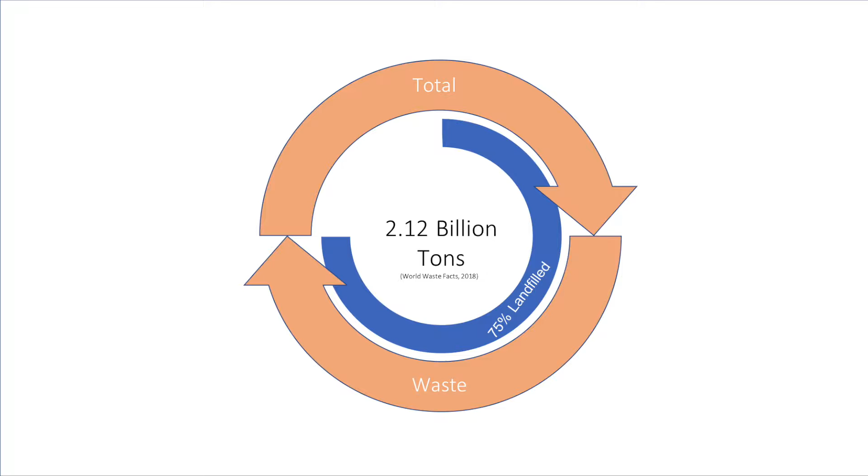Currently, 2.12 billion tons of waste is produced globally each year. Picture this: if a garbage truck were loaded up with 2.12 billion tons of waste, the amount of trucks needed to hold this waste would circle the earth 24 times. 99% of what we buy is trashed within 6 months of ownership. Only 3/4 of this waste is disposed of in landfills, with only 1/4 being recycled. The United States alone generates 380 million tons of municipal solid waste per year, with approximately 63.5% being landfilled.

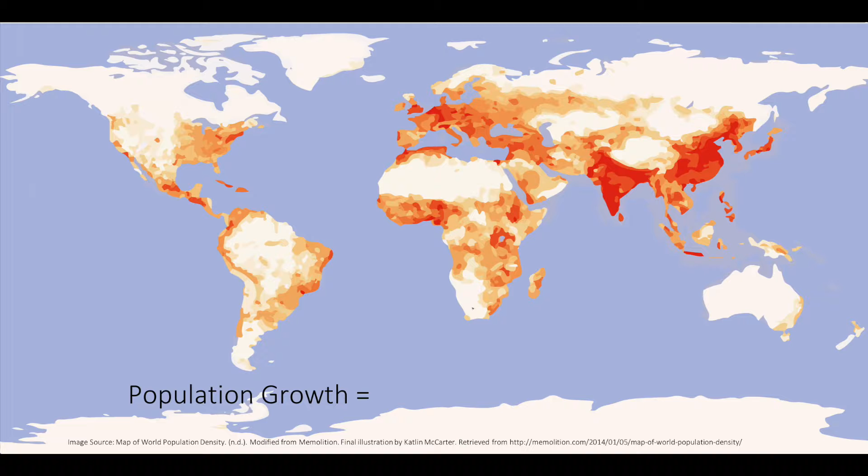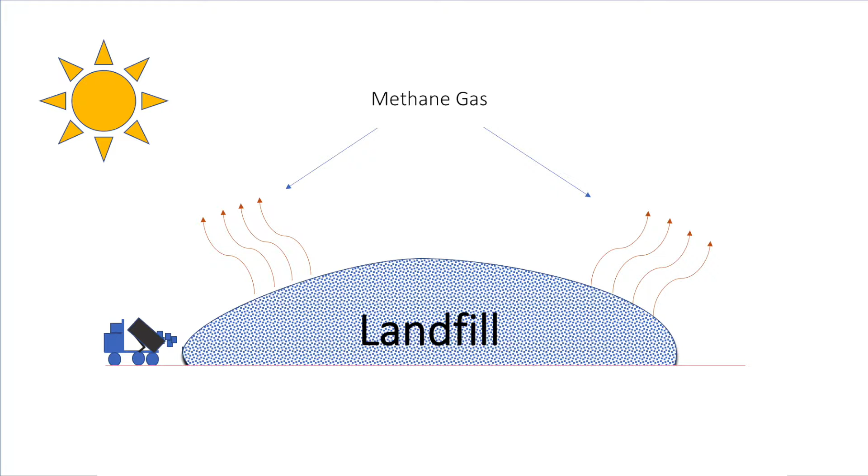As population growth and waste consumption increase, the available space for landfills becomes less. The current state of landfills also poses a threat to the environment. Methane gas, a byproduct of waste decomposition, is a greenhouse gas. Also, leaching waste may pose a threat to surface water and groundwater. As far as we know, packing everyone up and shipping them to another planet is not an option. Also, living on a mountain of trash is not ideal either.

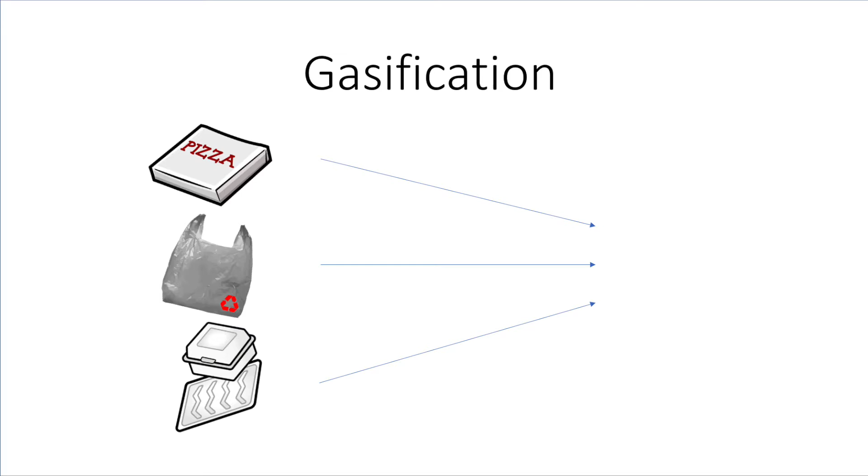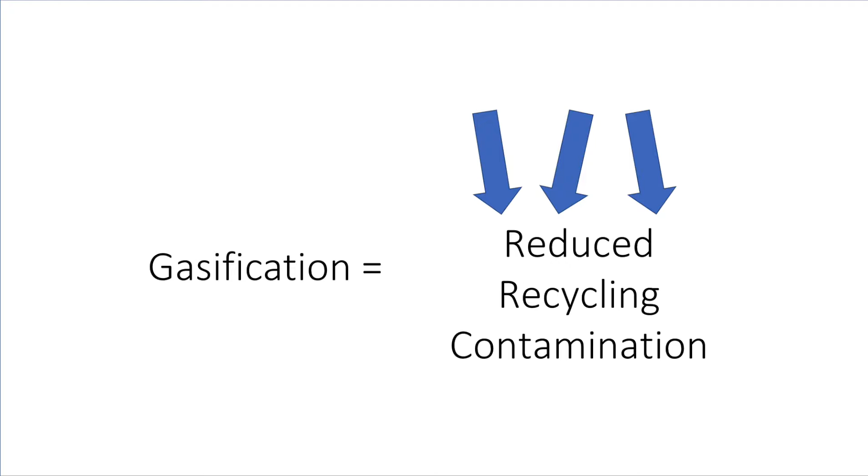Gasification offers a relatively simple solution to the problem at hand. Gasification is the process of taking everyday household items such as pizza boxes, plastic bags, and styrofoam and turning this material into clean, reusable energy known as syngas. As far as the disposal routine within each community, the gasification process offers no real difference. In fact, gasification may offer a solution to the current recycling contamination issues set forth by China's Green Fence policy.

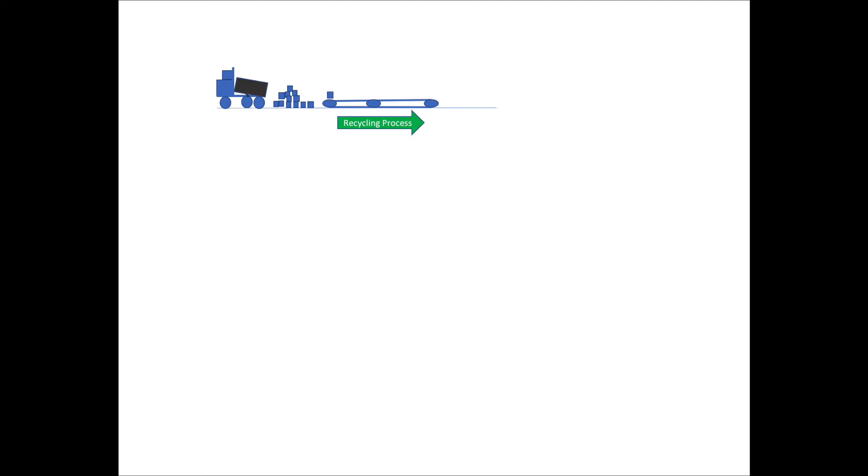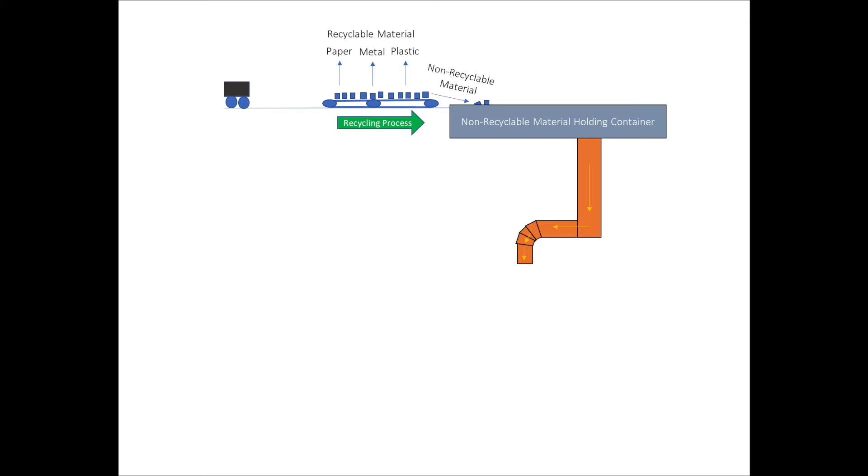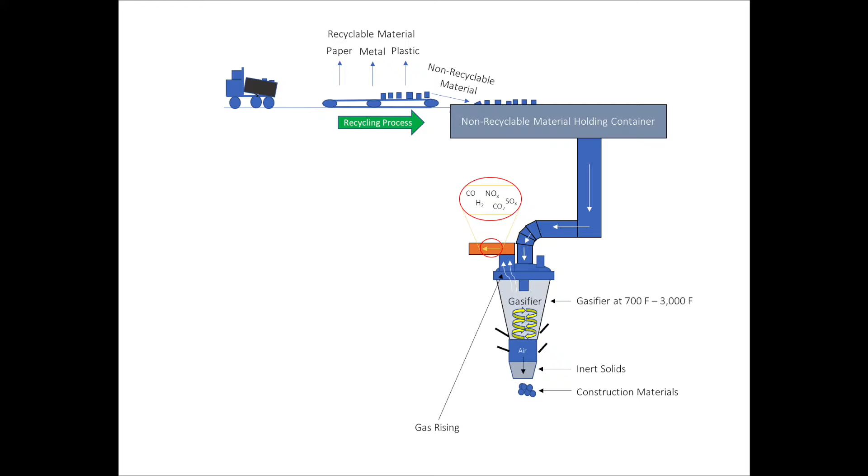At the gasification facility, a truck carrying a week's worth of municipal solid waste will dump all its contents onto the tipping floor. The material is then loaded onto a conveyor belt where the recycling process can begin. All eligible recycled material, such as paper, metal, and plastic, are separated out and baled for future repurposing. The non-recyclable material is then placed in a non-recyclable material holding container where it dries out and waits to be processed through the gasifier. Once the material is within the gasifier, inert solids pass through and can be used for construction material. The gas then rises up containing carbon monoxide, nitrogen oxide, hydrogen, carbon dioxide, and sulfur oxide.

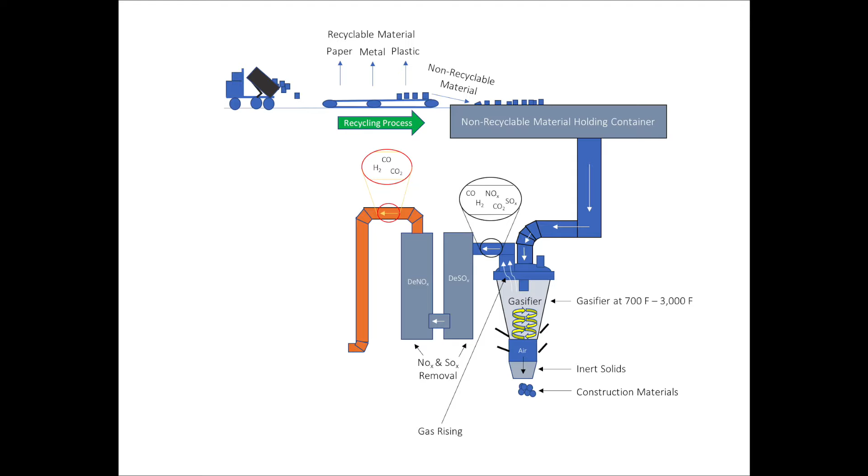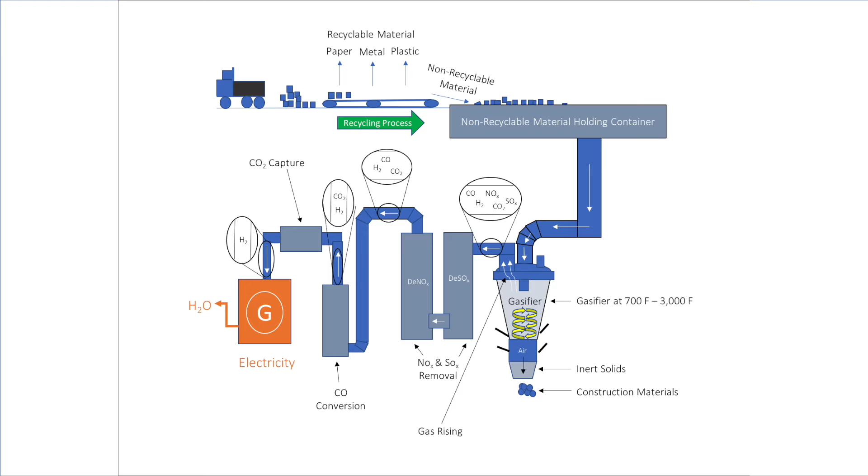The gas then passes through DESOX and DENOX systems that remove the nitrogen oxide and sulfur oxide. After passing through these two containers, the gas contents are now only hydrogen, carbon dioxide, and carbon monoxide. The carbon monoxide is then converted into carbon dioxide. Carbon dioxide is then captured and stored while the hydrogen keeps passing through and turns into electricity. The final product of the gasification process can be used for steam, hydrogen, for oil refining, consumer products, substitute for natural gas, chemicals, fertilizer, transportation fuels, and power.

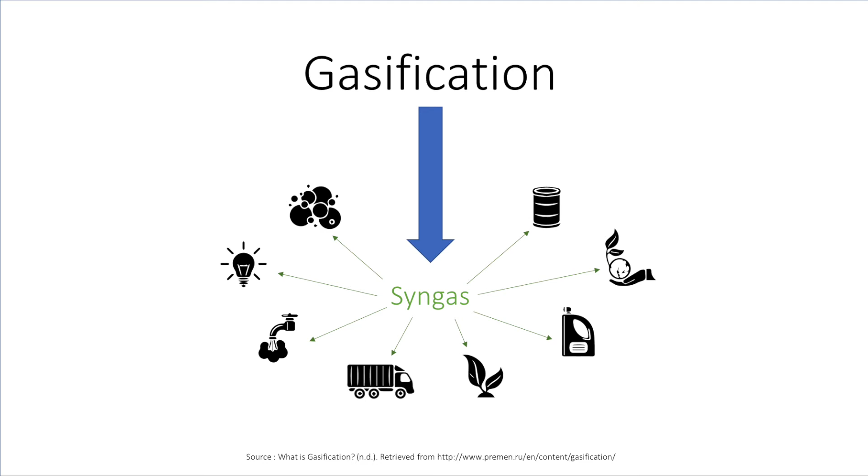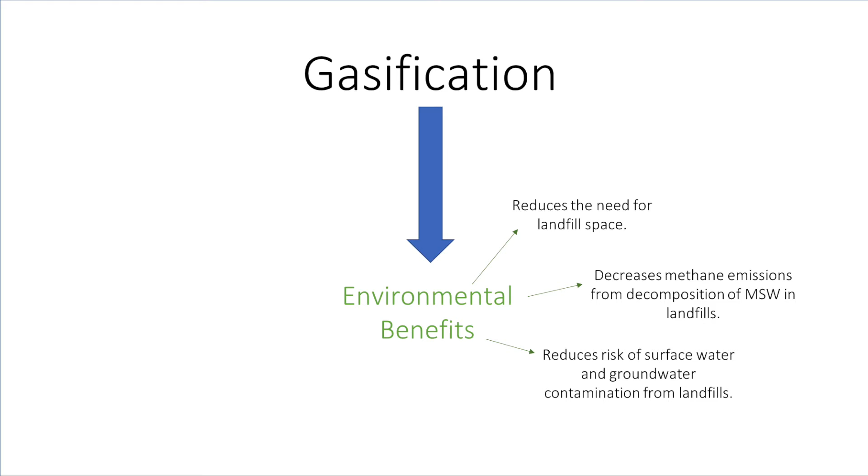The gasification process closes the loop to the waste issues associated with our consumer-based society. The environmental benefits associated with the gasification process are: reduces the need for landfill space, decreases methane emissions from decomposition of municipal solid waste in landfills, reduces risk of surface water and groundwater contamination from landfills, extracts usable energy from waste that can be used to produce high-value products, enhances existing recycling programs, reduces use of virgin materials needed to produce these high-value products, reduces transportation costs for waste that no longer needs to be shipped hundreds of miles for disposal, reduces use of fossil fuels.

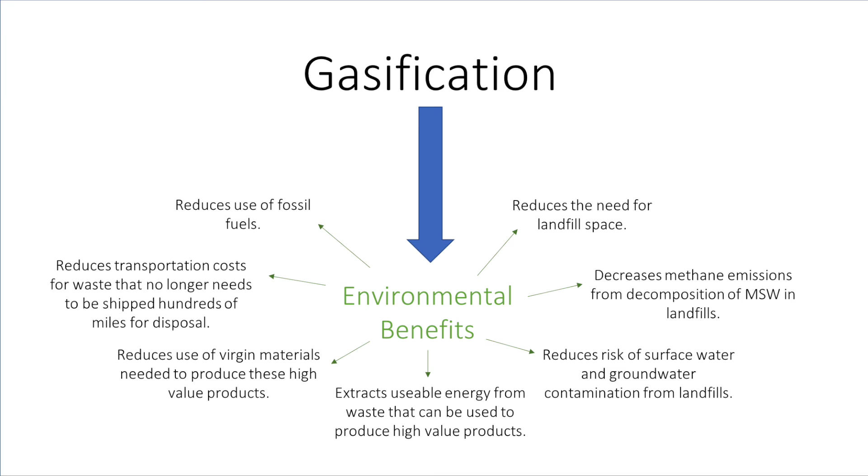The linear process of consume, dispose, and landfill needs to be reevaluated and redesigned. The rapid consumption and disposal of industrial waste and household waste is no longer something that can be pushed to the curb and forgotten about. Although the initial cost of the gasification process is high, the end results provide a closed-loop solution that eventually will result in financial gain.